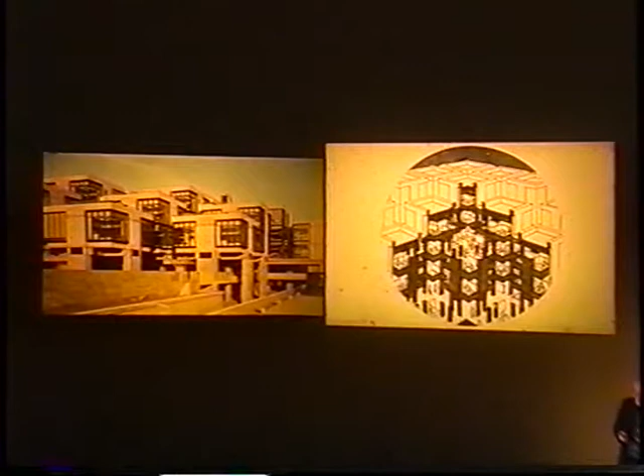And all the different ways of organizing an office building did not affect the building actually. And this is due to the fact that what was made, you may call a structure, a whole, which can change its infill. So you see the people have different clothes, they have different tables, you know. It is like a big tree which changes its leaves every year. So the tree remains the same, and the leaves are changing.

I can't handle this.

This idea of the structure and the infill started for me with these two pictures. They're both amphitheaters, and the one amphitheater is interpreted as a complete town, as inhabited. The other amphitheater is interpreted as a piazza in the city. So the city absorbs the amphitheater from this side and leaves open this piazza, and in this picture it absorbs the amphitheater from this side and leaves open the surrounding. Both are the same structure.

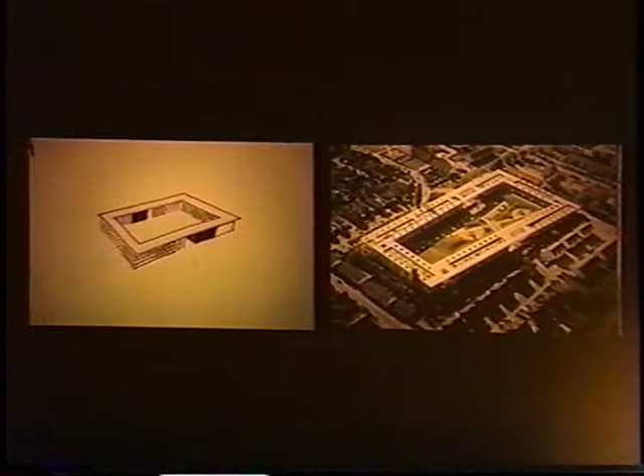In different circumstances, in different periods, the same structure is able to give direction to a completely different thing. So I am basically seeing a difference between the structure of a building and its infill. Its infill being temporary, and the structure having a longer time cycle. Like in a city, streets remain, not eternally, but have a long time cycle, and the buildings have a short time cycle. And this is, I think, an idea to be able to cope with time, with change in time.

This is a housing project in Germany where we try to counterpoint this sprawl of private housing, because all the people, like here in Los Angeles, want to have a villa for their own, and in this neighborhood without any identity, without any structure, we made a sort of clear gesture, and the clear gesture is in fact the roof, and under the roof there are different housing types. These houses are all designed by us, but they could also, thinking urbanistically, be designed by different architects.

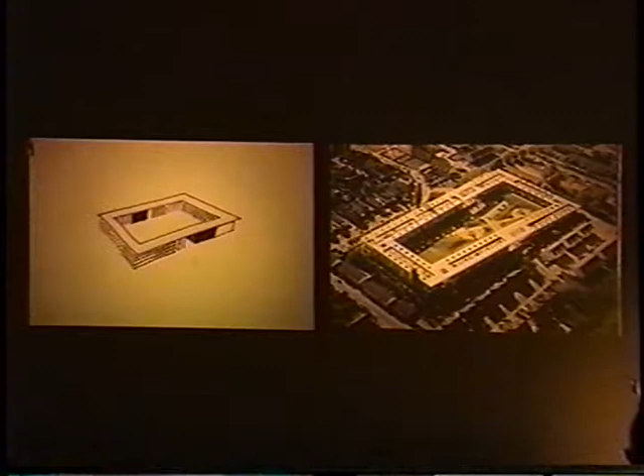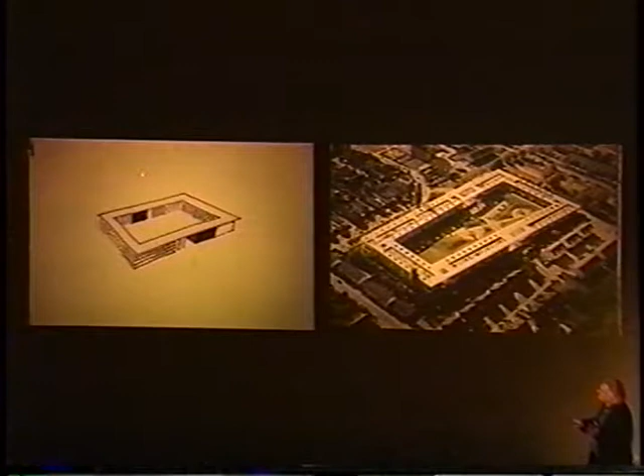The roof is even going down and going up. You see it here. There sometimes are 2 stories, sometimes there are 3. And the idea is, and this is the sort of idea I'm looking for all the time, to make this sort of gesture that can house all these differences.

Here you see the inside of the block, which is a sort of place, a green place where children can play, and where all the entrances are at that side. You know, all the entries are at that side, and this is the outside where you have the gardens.

Are you doing it now? I don't know. It doesn't respond to my pushing.

You see different housing types with communal staircases and with gallery streets in the air, houses on top of each other, and this all is dominated by the big roof from which the balconies are suspended, and which is sort of made more clear by having these holes.

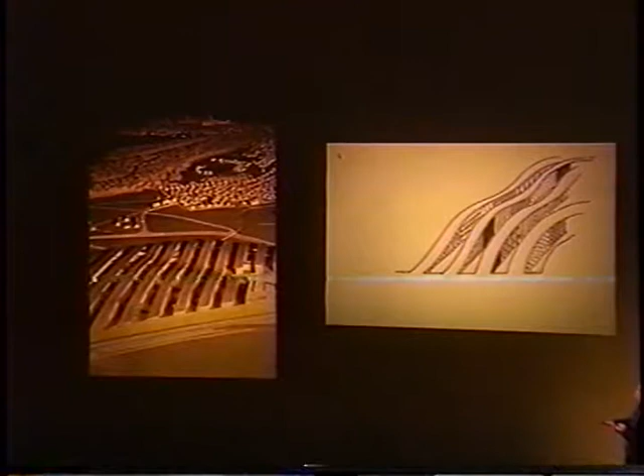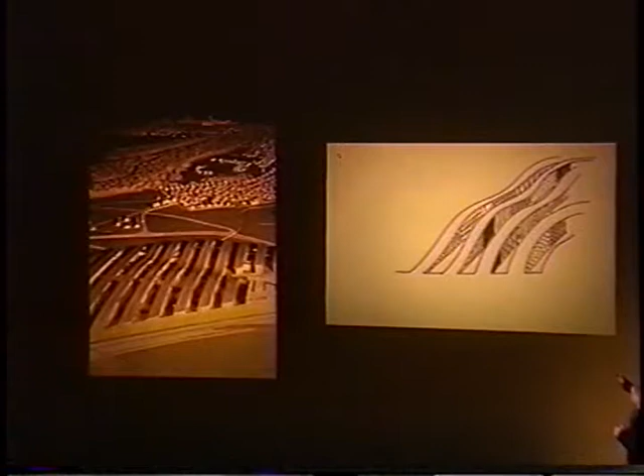Our idea was to continue the landscape and, as it were, dig lines in it, dig streets in the landscape of this artificial hill. This is an artificial landscape where the grass is just continuing over the roofs. You can walk over the roofs, and under these roofs there is place for all these differences.

So the different people who are settling there, they can hire their own architect, and all these architects can make their own little thing under it. And the roof, so to say, is keeping it together as a structure, as an enveloping gesture.

So you see, you can maybe recognize the different architects that all made their beautiful thing. You have some round ones, you see some Richard Meier buildings, you see all sorts of also very modern buildings that don't like to be in line, and all the possibilities are there, and it is all, so to say, mitigated by this smooth landscape taking it together.

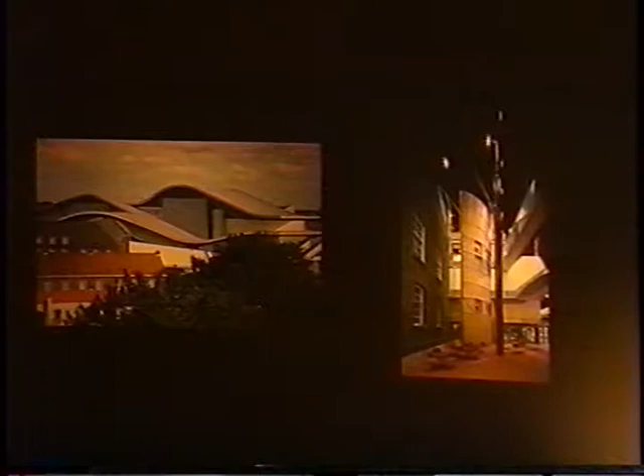So what you see here is how this building, if you still like to call it a building, is squeezed in between existing buildings, and part of that thing is, as I said, decided by theater engineers, the distance, all these measures.

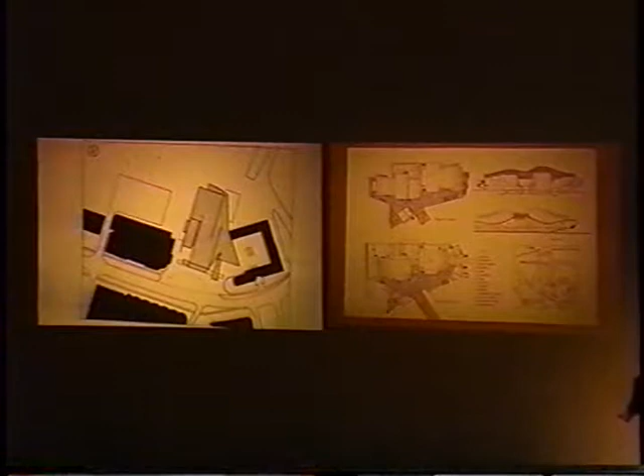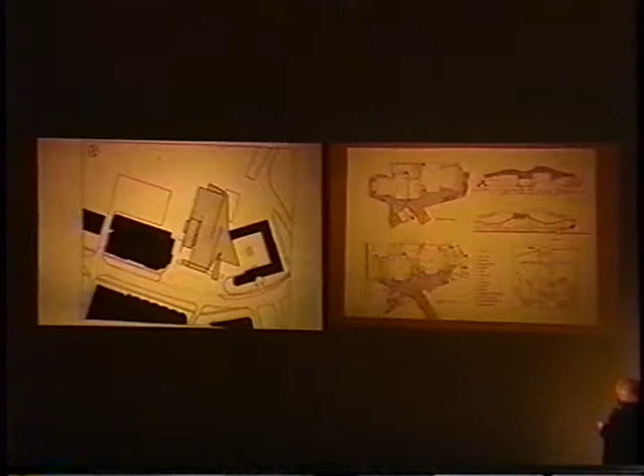And here there is the film house, here there is this existing building, and the site is so thin that the building is squeezed in between the other buildings. That's due to the fact that the nice plots are sold to developers, also in Holland, and for public buildings there's only plots available that couldn't be sold because they were too bad, and so we have to deal with these very strange squeezed locations.

I'm beginning to learn.

And so we had at a certain moment a model of all these parts organized as good as possible together, and we thought, what are we going to do with this? I mean, this is going to be a mess. This is a sort of chaos of elements that are all placed in the right position, in the right relation to one another, but how to get this together.

And then we decided to fold a piece of paper on top of it. In fact, there was a big model, and we covered it with paper, and we started to cut in this paper in such a way that it was, so to say, falling down over the different elements. And in this way, by means of that roof, we kept the whole thing together. So the roof became once more, like in that housing project, the means to keep the elements together.

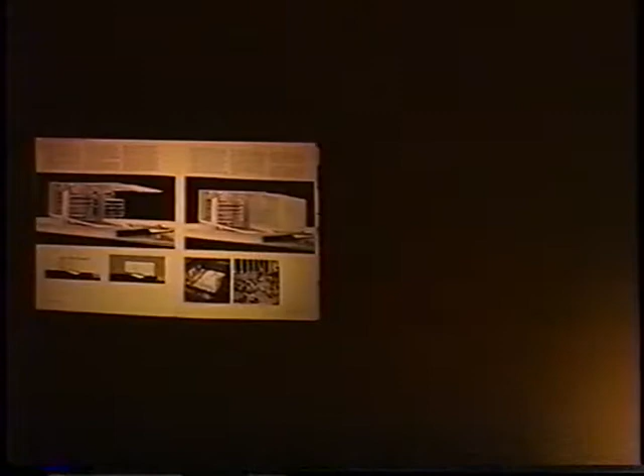This is another building which is designed in an urban way. It's a competition. We did not win. These people did not understand; well, it's always like that. When you do something understandable, you win, and when you do something which is a step ahead, you're not winning. This is in a cold climate in Malmö in Sweden, where they ask for a university library, which could be part of the city and of the university.

So they wanted to use this library to hinge the city to the university. And what we actually did was make this envelope, this form, this concrete slab that is going around, and which can house a building. And I'm not so much interested to build this building. You could ask an architect for designing this thing. But for me, the most important thing was to make this envelope in such a way that you have the conditions to make this into a big city piazza.

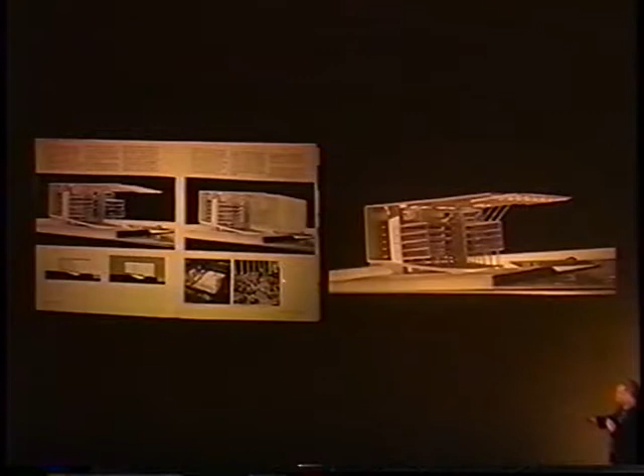So the idea is to have curtains that you can put around, so that you have a city place like the Rockefeller Center, where you can make an ice rink, or you can, and you see we have this sort of tilted floor, so that you can make steps and have people sitting, and maybe have, I don't know what sort of activities that are done by the university or by the city or together.

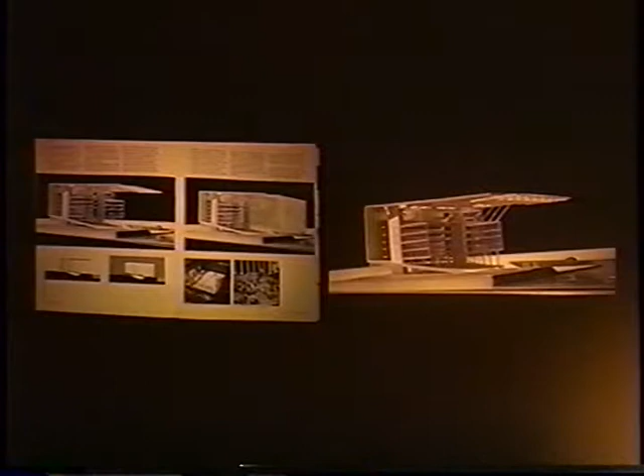I don't know whether this is the first idea for a city piazza which you can close off and protect by means of curtains. But the idea is in fact simple. We studied the idea of circus tents and found out that they put up these circus tents within an hour and a half, and with the same means we would be able to put these curtains up and have this place.

And you see, these are two pictures from New York. I made them in '68, and the one is showing how an ice rink can be the heart of the city, and the other is the steps of the Columbia University, meant to be monumental, in order to underline. This is what the architect wanted to do. He wanted to underline the solemnness, the importance of this university,

and therefore in the history of architecture you have steps to put it on a base and to let people walk up. But architects cannot prevent that the steps are also going to be used in the reversed way and become a grandstand. This is one of the most beautiful mechanisms I know about. Conditions for monumentality that become reversed into conditions for informality. And I'm inspired by this means to use in my buildings.

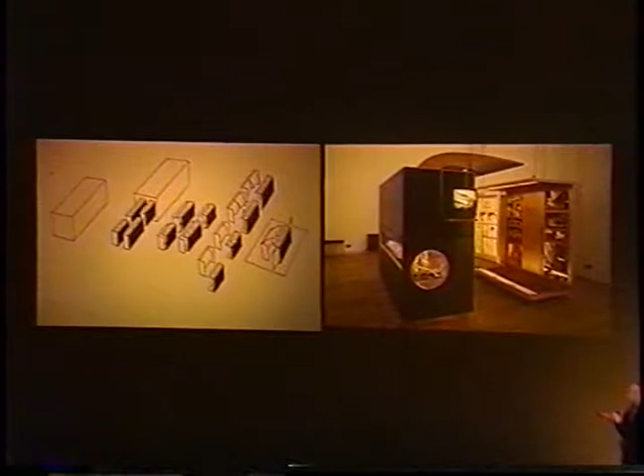This is a completely different thing, but it is sort of related in form with this project in Malmö. It is a traveling exhibition of my work. There are 4 pavilions that consist of 2 elements, and they are like this Malmö thing. There are envelopes, the one in this direction, the one in the other direction, and they are put together like cages and then put in a container and shipped over the world.

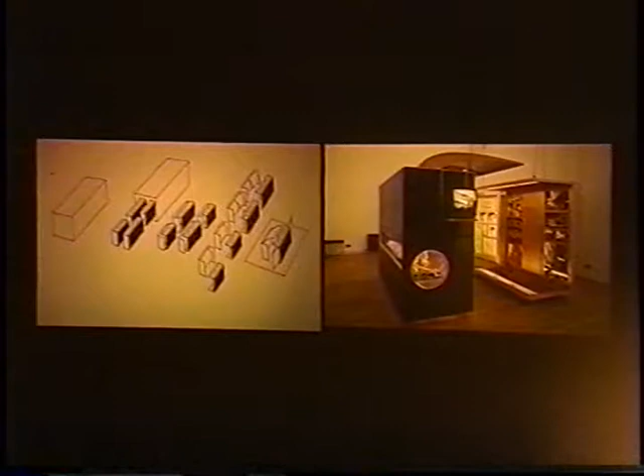The nice thing is that you don't need big material because the pavilions attract people, and once you are in, you are so near all the small material, all the small photographs and the small models that you don't need to make them larger. And the idea is that these parts can be put together and put in the container and shipped.

And you see all the small things that are exhibited here, and you don't need to rearrange the exhibition every time. You don't need to send people to this or that place to check in what space the things are going to be hung and rearrange, make a design, because the thing is ready. And this is with all the working models. Here you see the theater I just showed you, and people are attracted by it, and they go into the pavilions. They have their own lighting, and I think it's sort of the same idea of making an envelope.

I stop calling it structure from now on, because structure is a word that is not topical. People today are just very creative to avoid the word structure. For the moment, I keep it with the word envelope that contains all the work.

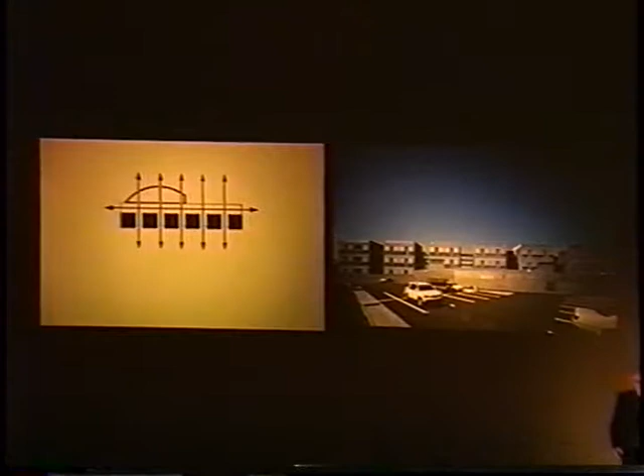And they're the sort of thing architects use because they are unable to make a good project, and they are invented because architects put their rooms together in a non-urbanistic way. As soon as you think urbanistically about your building, you are making streets but not corridors. And the difference I'm going to explain to you.

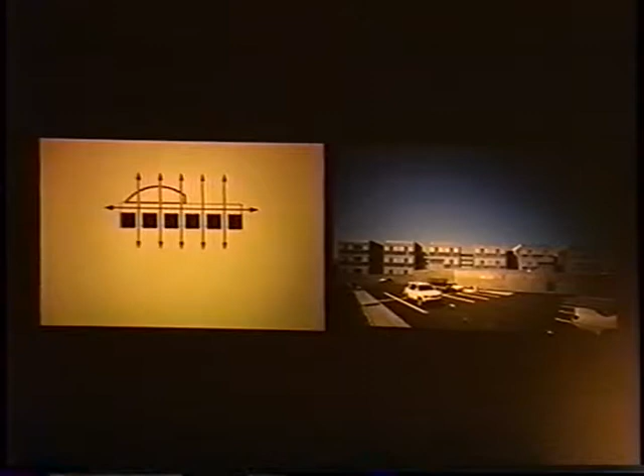So one of the possibilities is what we did here. You have bits of corridor that are never dark and never have the feeling of too much closedness, because you walk over these bridges all the time. So there is no way of having these buildings vertically organized. It's not houses for different groups of people. The building is just organized in a horizontal way, but it's just taken apart.

And you see how these parts work with the bridges, and you are looking out, and this is quite nice. And adjacent to that series of tower-like parts, here you see, there's the communal dining area with kitchens, self-kitchens, library, and all the other things. And this is organized in a strip, with outlook to two sides, where there's gardens and where there's a Japanese pond.

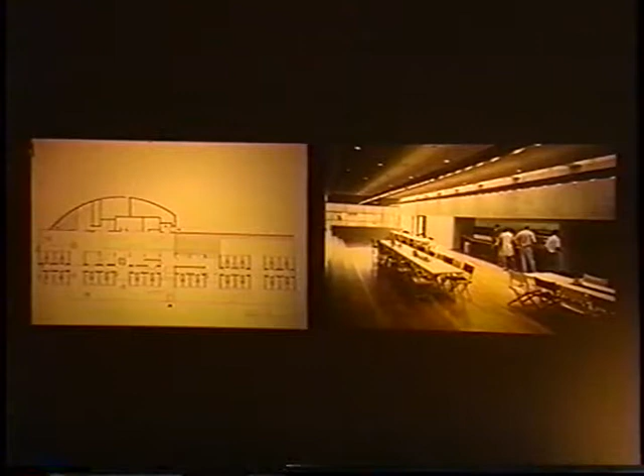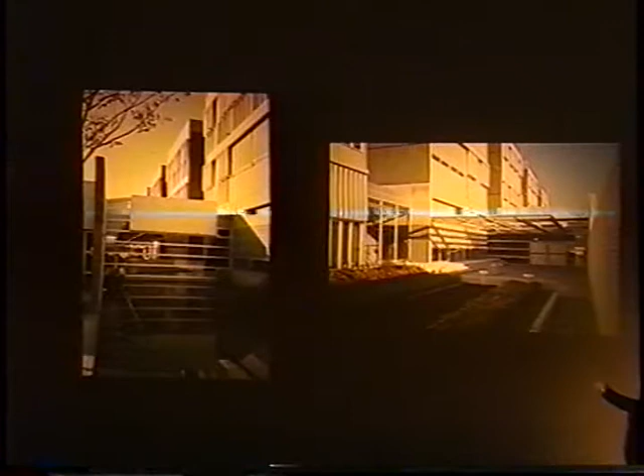And so this is the annex of the building with skylight here, and always stairs. I always use stairs to provide the possibility of informal sitting, and the stairs are able to also anticipate the unexpected. So here you see how this space relates to two sides. The site is quite small, and we try to make it as long as possible with very big sliding doors, outside terraces, strips of flowers, in such a way that in every time of the year there is something blooming.

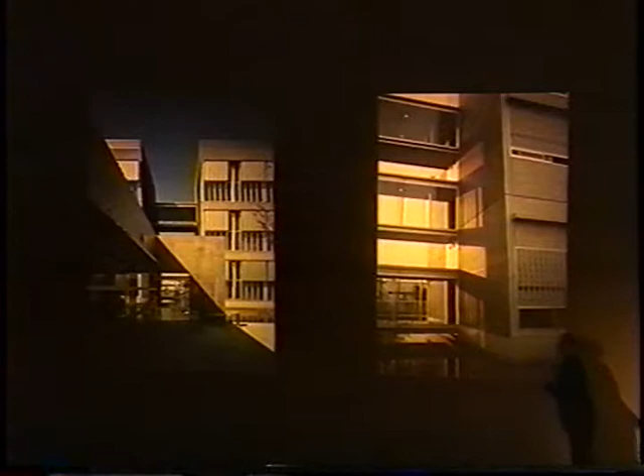And here you see the outside, all this beautiful Japanese concrete, which we made like the skin of a crocodile by means of a plastic, I don't know how it is called. This is a sort of sheet with all these small bubbles on it, which they use for insulation purposes. And then it was rolled with black paint, and the holes are kept as concrete.

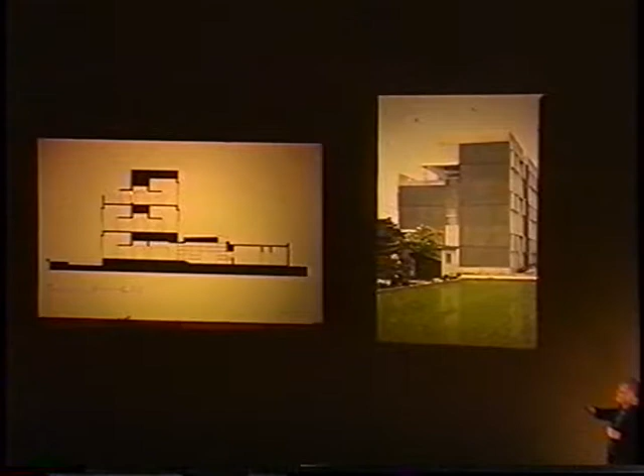You ask yourself maybe how it is possible to make these bridges with the air in between. The solution is that our living units are in two floors. We have a section so that the units have a mezzanine, and the streets, not corridors, are just on this floor, and this is not used. This is just for technical equipment, so that you have these high windows, and what used to be a room of this size became now a room of this size plus an extra room. And on the roof there are terraces, and so you see this is the height of one living unit, and this and this and this.

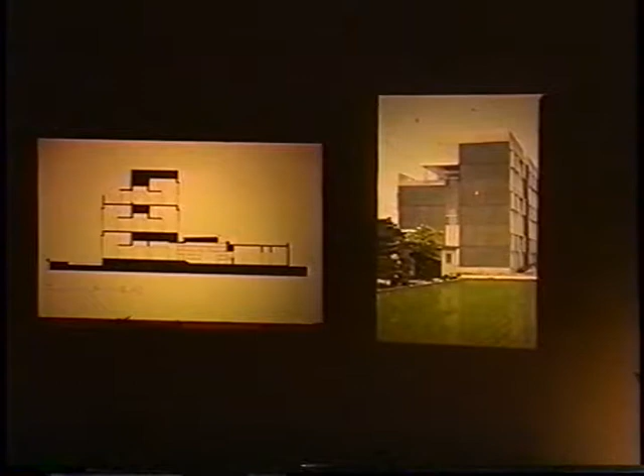So there's a mezzanine, which is diagonal. When you know about Le Corbusier, his early work, you see how this diagonal is exploited. By making the void diagonal, it gives more space. Voids are very important because they break through the imperative of the height of rooms. A void in a big public space is quite usual and very beautiful, but as soon as you do that also in small rooms, it gives a feeling of more than just a room.

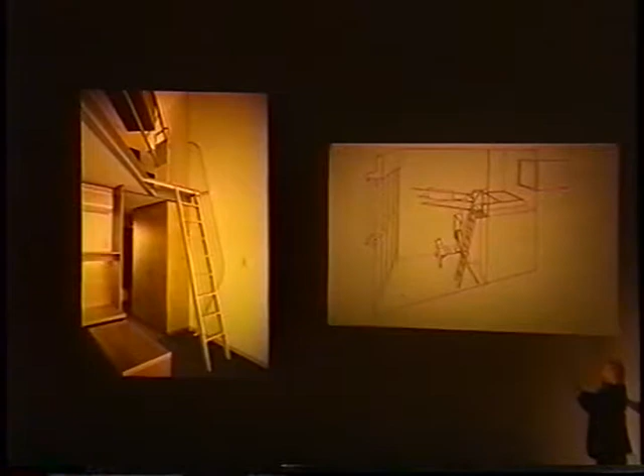And the people living here, that we interviewed about what they thought of their living unit, most of them said, independently of each other, that they liked the idea of the mezzanine because it was more a house than a room. So the difference between a house and a room seems to be that you have different possibilities. So you can have your sleeping business upstairs and have people downstairs.

The Japanese are very clean, but there are lots of Americans also in that dormitory. So they like to have a separate sleeping unit where they can keep their bed and everything the way they want, and still have people around downstairs. So this old idea of the mezzanine gives space in the double sense. It gives space to the people so they don't need to clean up their things always. Space in the sense of liberty, and also the feeling of breathing more freely.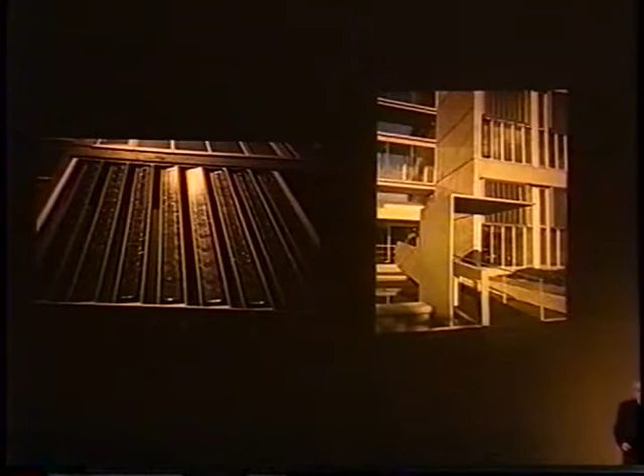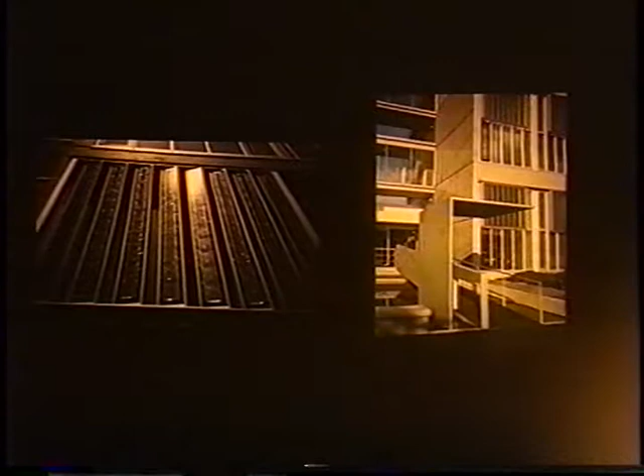So now you get rid of the sun in a quite nice way, because the sun is absorbed, is eaten, so to say, at these places by the solar cells, and is transformed into energy. What I wanted to do, but I couldn't get that through, is that energy would be used by making them movable, so that they would be self-directing by means of the energy they ate. That would be almost biological, and I think that would have been nice, but they wanted to have it used more seriously for the lighting in the building, and that's what happened.

This is the big school building of which you made that poster. I don't know how you got that photograph. Maybe it was sent by my office, but I didn't know about it. But this is a big school, in our terms a big school. You may call it a small school, but it's for 1,300 people, and actually it is not a school at all. It's meant to be a school, but it

works for 57 different nationalities, because in Holland you have a lot of immigrants. And these immigrants come from all places over the world, also from places where they can hardly write their language, mostly from Africa and from the hill villages. And they come into our culture and they don't know what to do. They have no knowledge of the language. They are lost in the city.

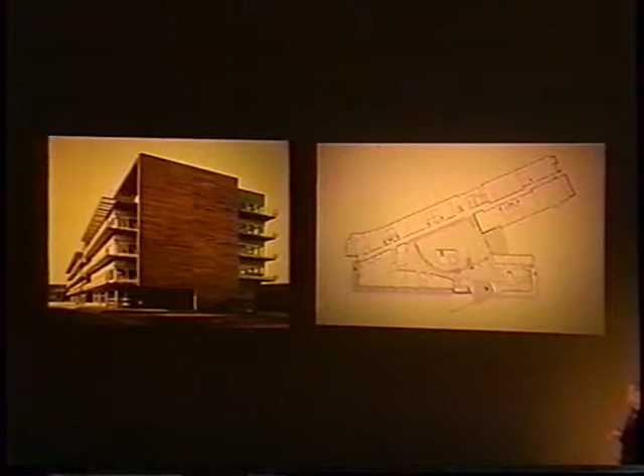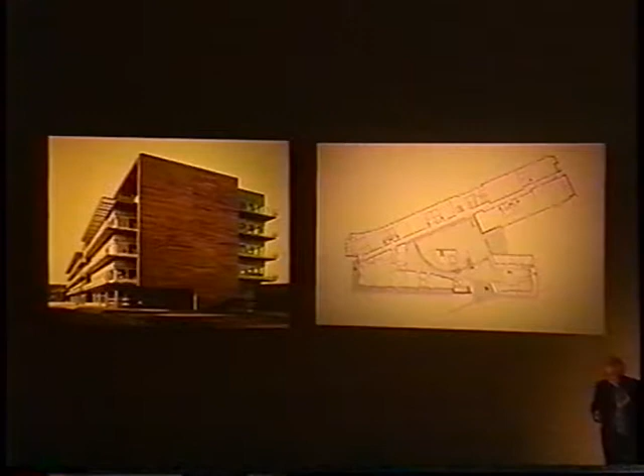And so this is a school, not very intellectual, but where they learn all sorts of trades. And I interpreted this as a place for these people where they would like to be, like to go to, and not be lost. So I wanted the interior really as a piece of the city, as city-like, as a model of the city.

And to explain something technical first, we had this split-level section, because that allows you to not make floors that are, so to say, separate from each other, but by making these split-level floors, there's no separation. You're not feeling this as slices anymore.

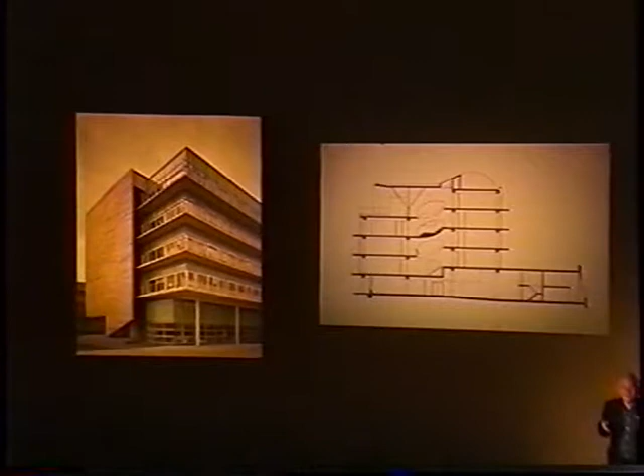And the other thing is that the fire department always asks for compartments. And when you have compartments, it doesn't work anymore, because then it's building-like. So we had all these galleries at the outside for exits, direct exits from all the classrooms. And what you see here is that this is a very deep building with the classrooms at the sides, and in the middle a very large atrium where all these balconies are hung.

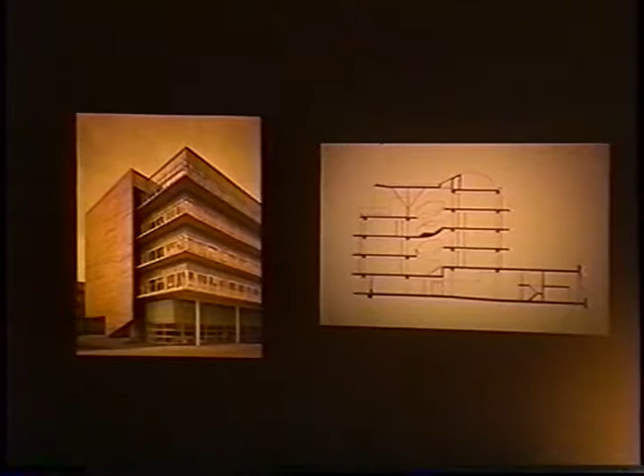So actually this building is one space, and in this one space you have these balconies where you can sit, where these 56 nationalities find places to hang out and to meet each other, because all these ethnic groups need, so to say, their own corner. So they'll find their own corner in one of these places. And these places are also appropriate for educational purposes outside the classroom.

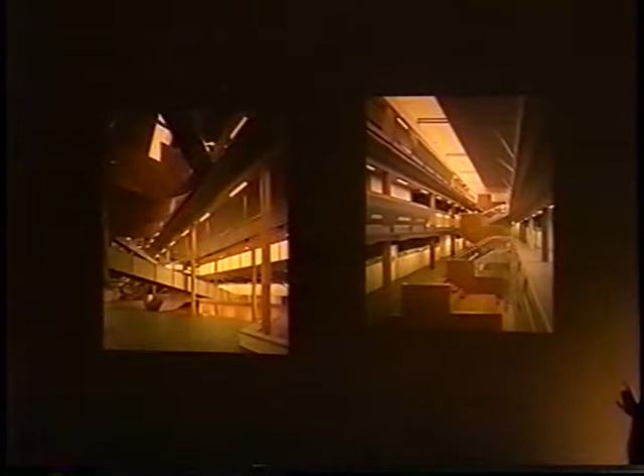So the classrooms all have this ongoing window, so that there's contact with this place, and this is a sort of platform where you can put tables. We had no money for tables anymore, but you can put tables. They'll find out where they can maybe drink coffee, or have lessons, or have reviews, or what you want. So, except for the official classrooms, we managed to have a lot of extra space which is not determined.

This is what I call space. When it's determined, it's not space anymore. When it's determined, it's for something, and it is subject to rules, subject to the power of people that are, so to say, responsible for that. So what I try to make is as large an area as possible, which is not under the responsibility of some teacher, but under the responsibility of the school as a whole.

And you see in the middle there is this elevator, which is only used by the teachers, and here you see the hall, the big hall you saw on the plan, which is the central piazza. There's no auditorium, no specific solemn room, but it is just the place like in the city. I show you.

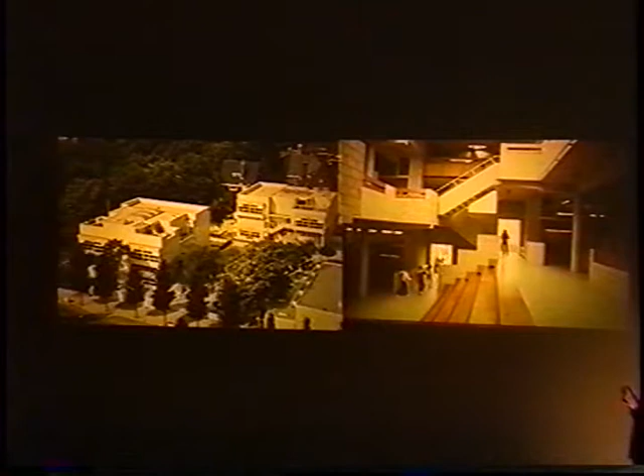If you consider the school as a micro city, and this is in fact not untrue, because the children who are living and working in such a school have to learn very much how they get along with each other. So a school is not just learning mathematics and languages. It is also and before all learning how to get along with each other, and therefore this model of a city might be relevant also in that respect.

I show you another school. We completed a small school with 8 classrooms based on a slightly different concept. You have the gym and all the administration things here. You have 4 classrooms, and on top you have another 4 classrooms. And in the middle you have the piazza with a quiet place, with some steps down, which is not part of the circulation. So the circulation is not going through that place.

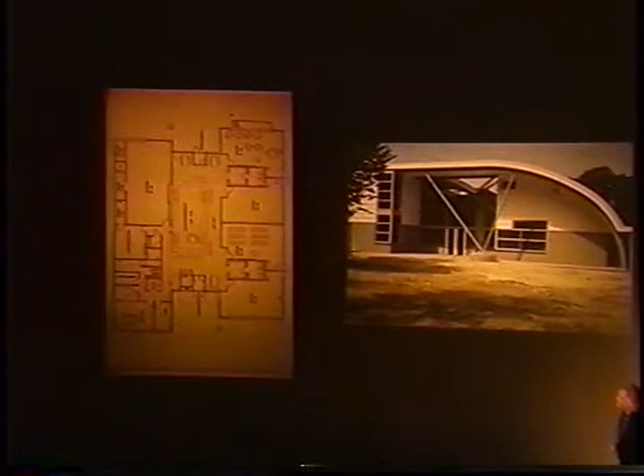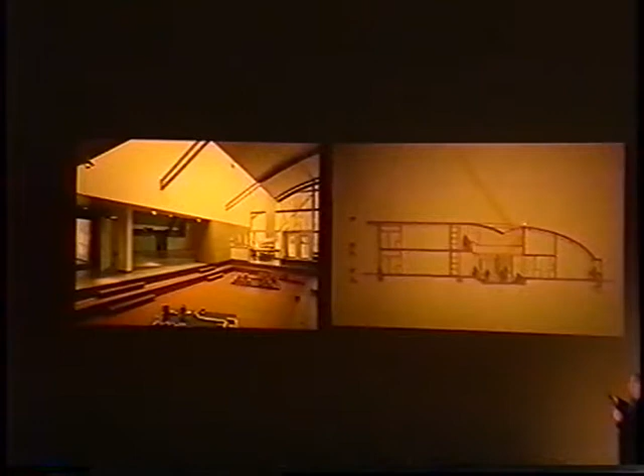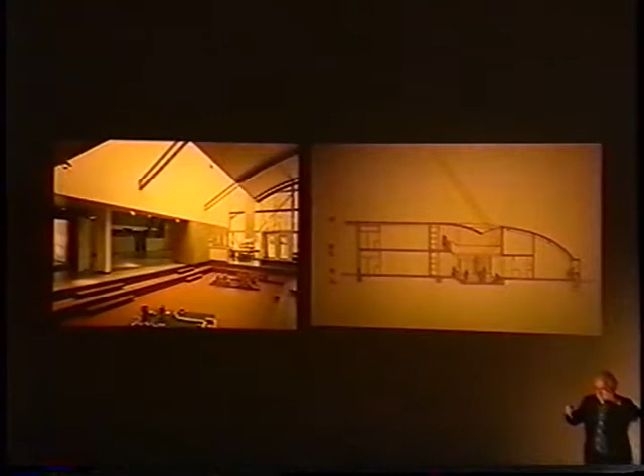Here you see that sunken area, and you see from what the children are making here that they make vulnerable constructions that are respected by all the people around. In some way or another, the fact that this is sunken and you have the steps again makes this a respected area, an area that is, so to say, recognized unconsciously as a place, and this is what I call place.

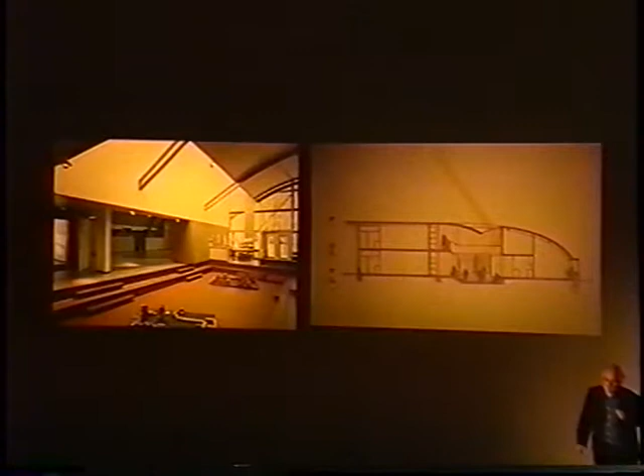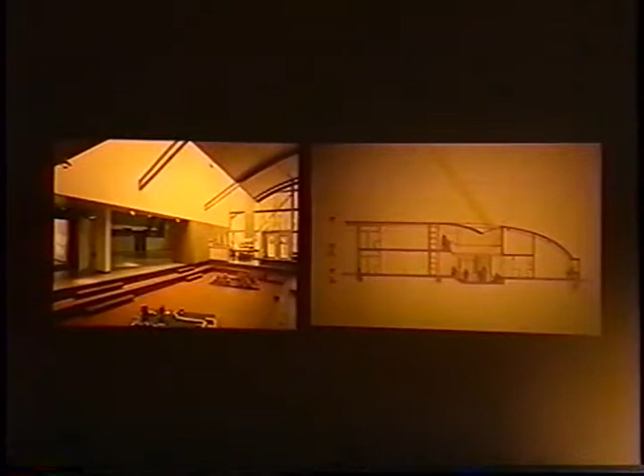So this school is organized around a micro piazza, because this is what the Piazza San Marco is in Venice, and what all the main places in cities represent. Of course, this is not a small city, it's the model of a city. There's a large difference between a small city and the model of a city. It is definitely not a city, but it's the model of a city.

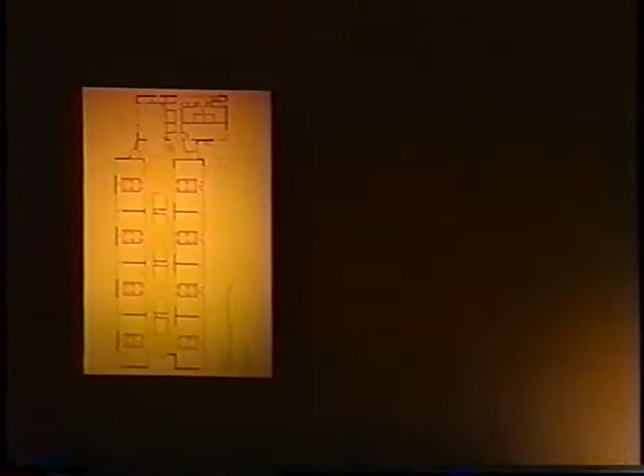This is another school which is based on a main street model. I mean, you have cities that are based on a main street, on a string, which is, so to say, collecting all the things alongside. And this school is of that type. And it could have been much longer. I found out that by making it twice as long, it would have worked as well.

And you could even make a very long school with different school organizations, just like in a street where you have different shops in the next block that have nothing to do with each other, except that they are collected alongside that strip. And what you see is that there is a sort of double corridor, which works as one alley, which is represented by this vault sort of roof.

And in the middle there is a train of adjacent spaces. I'll show you a photograph of this sort of small place in the middle. So there are sort of small neighborhood places in the middle, and here are the remedial teaching computer spaces. On top there is a library and all the things you need. Here are the classrooms, and in between the classrooms there are units for the clothes and the toilets.

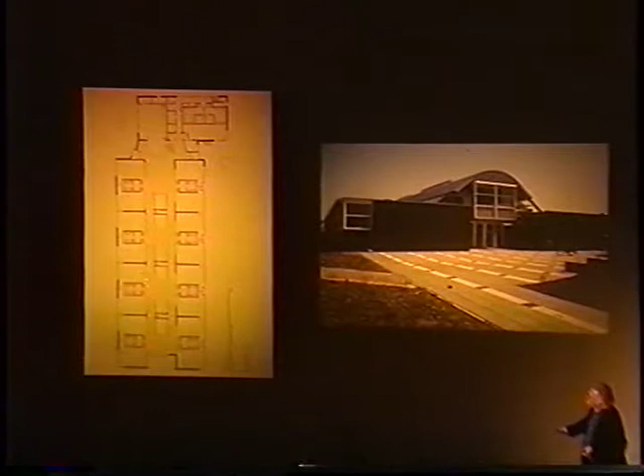And these clothes are very important because all the schools I've seen in my life are just destroyed by the clothes that are hanging in the corridors and that make it into corridors. And they don't smell nice when it's rainy, and you have no walls for putting tables anymore. In this way, by putting them in niches, you have all these walls at your disposal for educational purposes.

So no corridor. So I'll show you the no corridor street. There's in this school no corridor. You have these niches in between where you have the clothes, and everything is used. And the nice thing is that all spaces have their most active zone where the light comes from. Most classrooms have the active zone next to where the facade is. And here, by having the light coming in also here and having glass roofs here, you activate this part of the classrooms.

And by making extra ledges to the window frames, you give the possibility to put all the things they produce in these classrooms in this sort of shop window. And adjacent to the classrooms there are all sorts of activities and things. So what I try to do is to get rid of the strong separation of classroom and outside space called corridor. So the classroom is, so to say, blooming out into this central space.

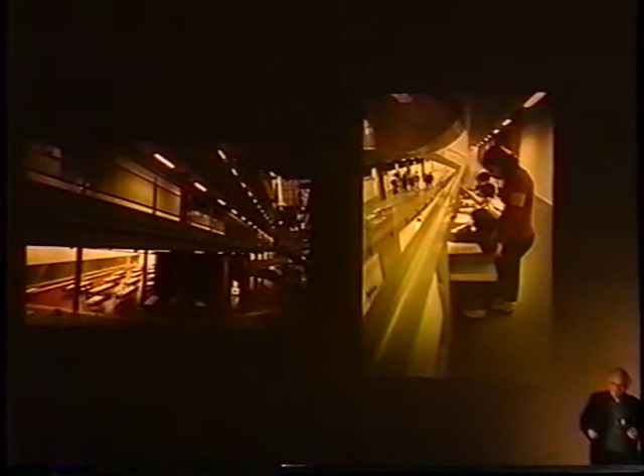And my idea is that when you get the table down, then the light will be there, and when you put it back, then the light will extinguish. And this will happen sooner or later. It takes some time. I think it's very important to activate also the outside space, the space outside the classrooms.

And so this is then the city center, the model of the city center, where you can see where the beautiful girls are and the beautiful boys, and where you can see and be seen, which is basically what happens in the city. And so consequently, I love stairs, and I make as many stairs as possible. For me, stairs are not just a sort of minimal thing because you need to go to the next floor, but I make more stairs than necessary everywhere.

Stairs, stairs, stairs, the full building, because it is just enhancing the movement, and the movement of the people in between the hours then becomes really city-like. There's an unbelievable dynamics in that school. Everything is moving, and I think that your building must be able to help that, so to say.

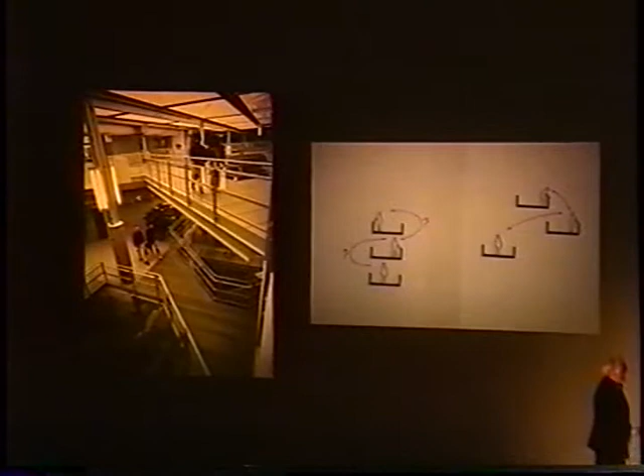Yeah, and this is in fact my story, how to get this dynamics. And of course, you can interpret this as straight lines, but can you imagine the next building where I have these bridges like this? I think this is what we really have to do, and this gives the dynamics in the building. Help.

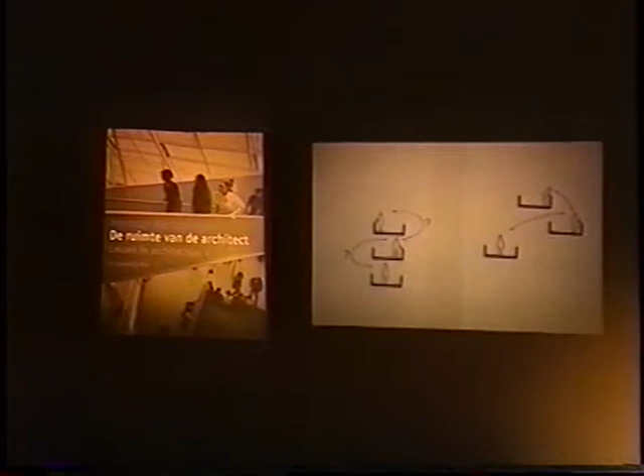And well, this was the cover of the Dutch edition of this book. We are having it with the translator now. So in a couple of months, it will be here. I'll send you a copy to school, which in fact explains about space and the architect, how the architect interprets the idea of space.

And this is a building I don't show actually, where there's also this bridge. It is another theater where this bridge is crossing the foyer, so that when you are going into the auditorium, you are moving in space. And all these bridges, that was the theater I've been showing you. All these bridges are such that there's always this relationship, these sight lines, which I think is important.

And to give you an American example of this, could you focus this a little bit?

The Guggenheim in New York, you know, is a building that is the subject of a lot of criticism, because there are many people who think that the idea of a spiral is inappropriate for a museum, and some people don't like to walk on these ramps. But maybe they're right. Maybe it's a very bad museum.

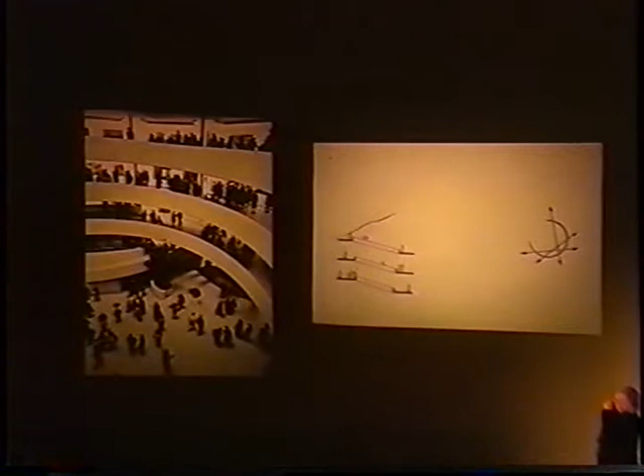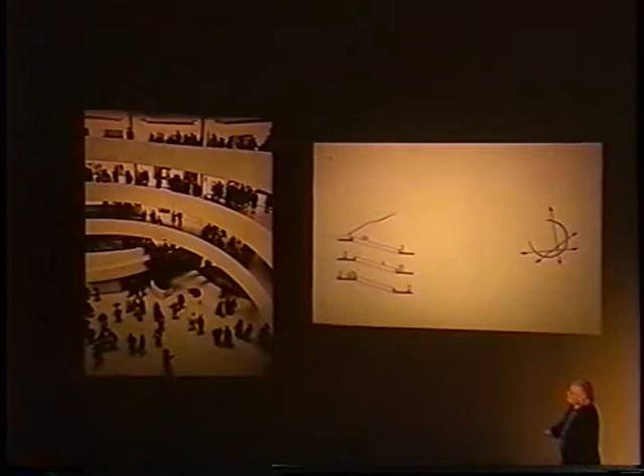So I think it's really a piece of genius because of this idea how to make a communal space into a social space, because you don't see only the paintings, you can also have a view on all the nice people there are, your friends, your enemies, people that you owe money and everything. They're all there, so you can see where you should not go, and you can see where you should go as soon as possible.

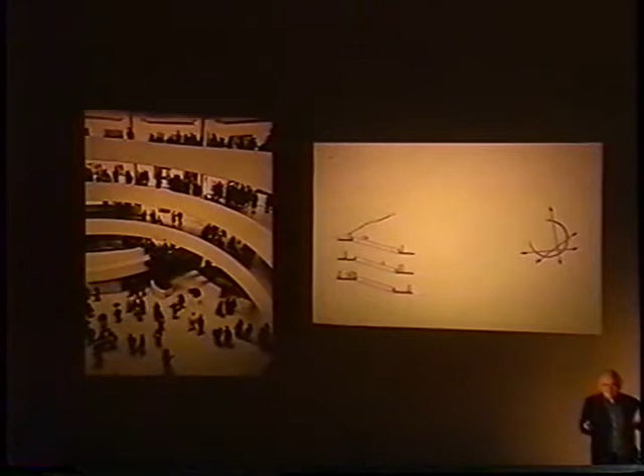And so this, for me, is the prototype of a space that is composed so that it has the optimal conditions for social exchange. And you can do it better. I mean, of course, it's a lousy building, but you can do it better. But it remains the prototype for me.

Help. They don't want anymore.

So far it was about space, and the other thing is place. View, outlook refers to space; protection refers to place. And so on the one hand, I think you must have in your building all these possibilities for outlook and being seen, looking and being seen.

On the other hand, there must be this minimal protection to be able to do your own thing and to not be disturbed. And let me say, the means to concentrate. And that's what, for instance, steps can do, and what you have to deal with in everything you make.